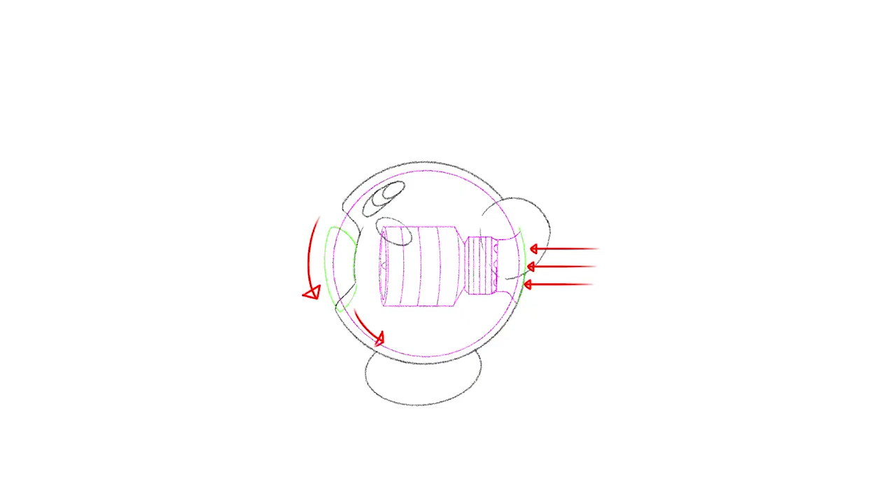The main feature I want for Kirby to have is to be able to blow air using a powerful fan and a motion sensor to activate it. So when someone walks in front of him, the fan will activate, producing a gust of air. I'm also planning a rear panel for air intake and access to all the mechanics inside him. I might add a moving mouth, but that's still undecided.

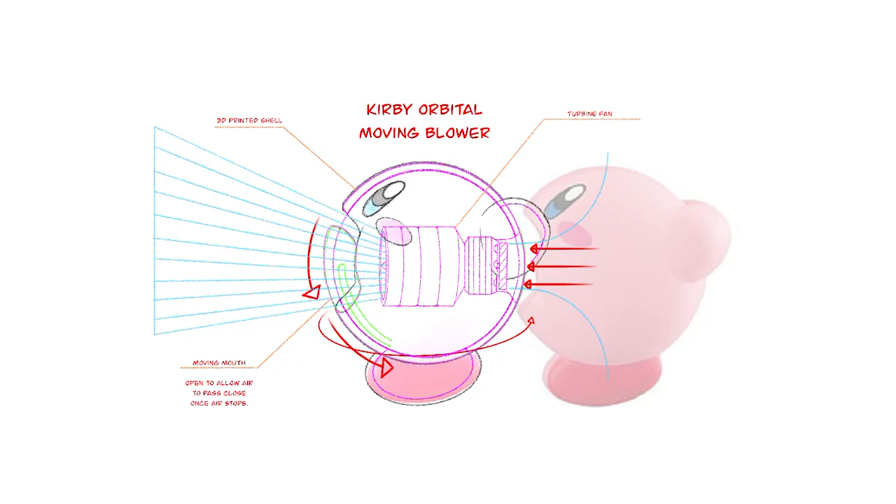His eyes, however, will definitely be able to move in all directions and light up. And finally, I want him to be able to tilt forward and back on his toes, enabling the fan to point up or down.

In Shapr3D, I based Kirby's body design on a simple sphere. He's one of the simpler models I've designed. There's not many fine details, so the design came together pretty quickly. The tricky part will be the eye mechanism, since Kirby's eyes aren't just simple circles.

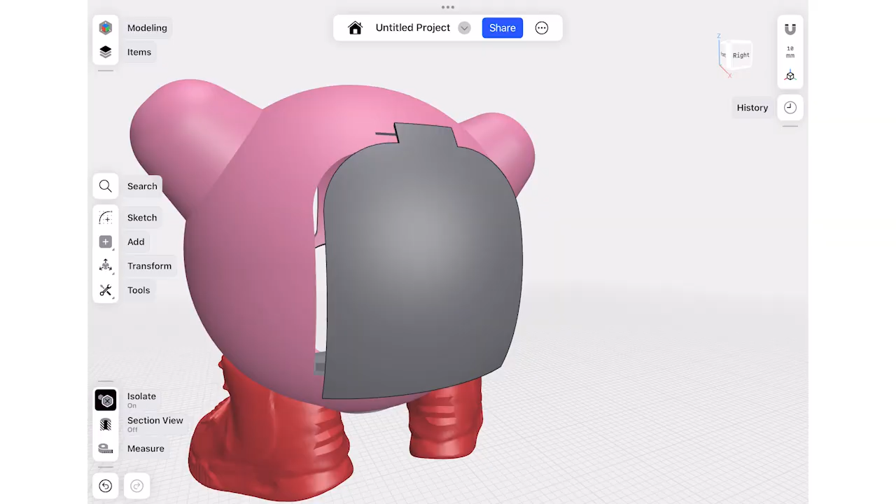You might notice that the shoes in my model don't match the ones in my thumbnail. I'll explain that in a future video. And the rear panel will be printed separately since it will need to be able to properly open and close. I think this is a good stopping point here though, and it looks just like Kirby to me.

Next, I moved into Meshmixer to cut the design into multiple pieces for 3D printing. I ended up slicing the model into 8 pieces. The way my cuts were made, I should be able to print each piece with less support in a shorter time period. The size I want Kirby to be reassembled is 18 inches arm to arm and around 24 inches from his feet to the tip of his arms.

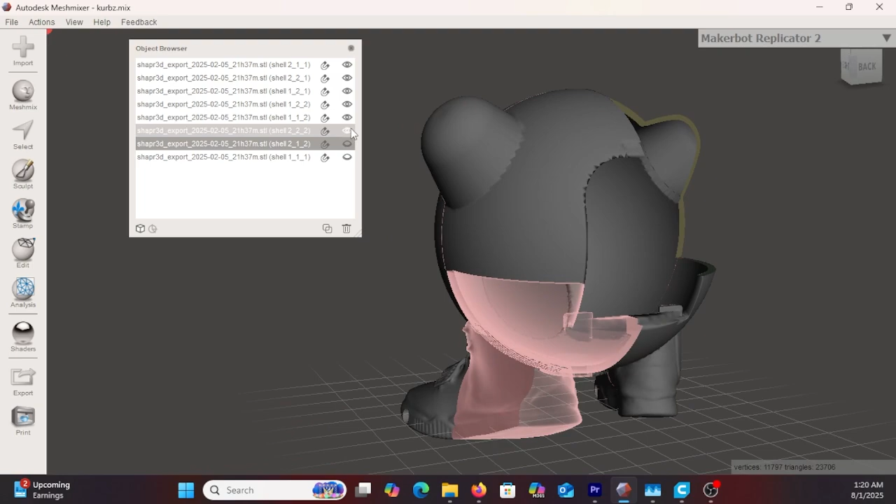I didn't add any male or female joints this time, but the seams will be glued later down the road. The bigger pieces will be printed on my Ender 3 V2 Neo, while any smaller ones will be printed later on my Ender 3 Pro. After all the parts were cut, it's time to send them to our slicer and prepare them for printing.

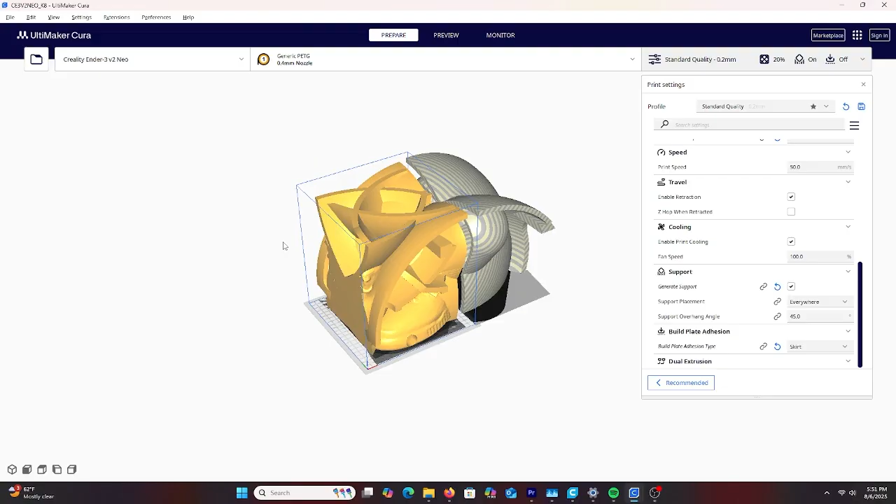Today I'll be using Cura to set up our print files. I imported and separated all the STL files, checking each piece's dimensions so nothing came out mismatched. This step is critical when printing large models on smaller printers because you want to maximize the print size without exceeding the print bed limits.

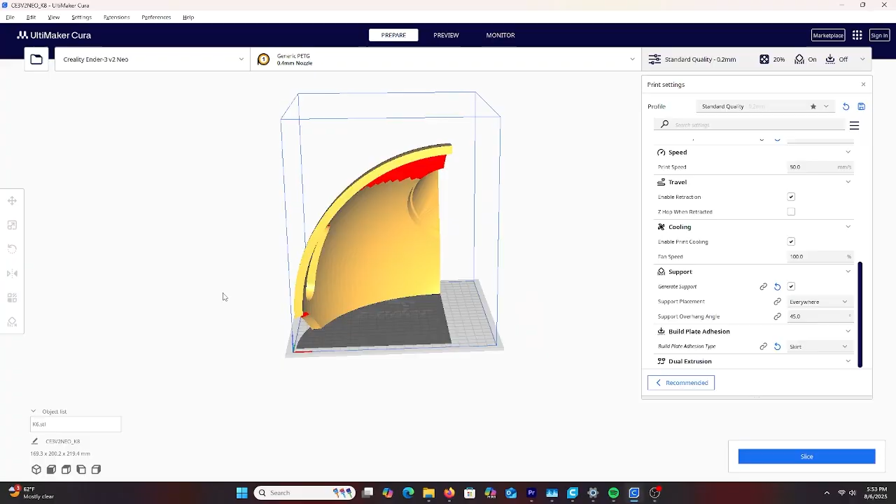That also means each piece's size is maintained relative to all the others so no part is the wrong size during assembly. Once all my files have been scaled up or down at once, and each piece fits on the bed, we're ready to print them all one by one.

After printing all 8 pieces, I gave each one a thorough sanding with 120 grit sandpaper on my orbital sander. I worked over the inside and outside surfaces evenly, but I also paid attention to the connection points. Those seams need to be a bit rough for the glue to bond effectively. Kirby's rounded design meant I could rely on my power sanders for the bulk of the work without worrying too much about damaging sharp details.

The sander made quick work of the rough edges, but I still checked each piece by hand to catch anything I may have missed with the sander. Once the major sanding is done, I'll switch to a finer grit before painting, ensuring the surface is perfectly smooth and free of even the smallest ridges. That extra prep will make the paint job pop and help the final piece look more professional.

One of the big advantages of printing in separate parts is how much easier it makes sanding and removing support material. You can hold each piece at the right angle and get spots you'd never reach on a fully assembled print. Of course, the trade-off is when it's time to put the whole thing back together, the seams have to line up with almost surgical precision, and there's no room for sloppy alignment if you want it to look like a single flawless piece.

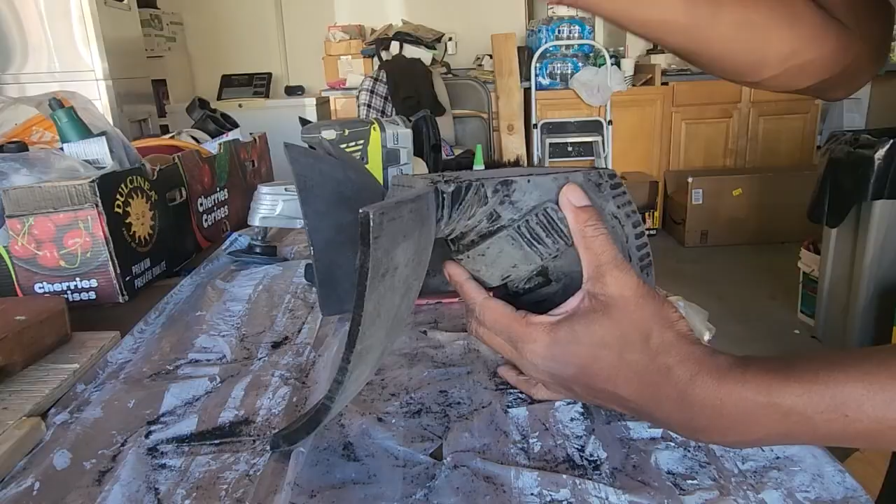To begin my gluing process, my go-to adhesive is Gorilla Glue Gel, specifically the one with the green cap, because it strikes the perfect balance between strength and precision. The gel consistency means it doesn't run or drip, which is a lifesaver when working with curved pieces like I am. Since I roughed up the edges earlier that needed to be glued, the extra texture gives the glue more surface to grip, helping create a bond that can stand up to handling over time.

Once everything was prepped, I moved fast. Gorilla Glue gel starts to set in as little as 10 seconds and can fully set in under a minute, so there's no luxury for slow adjustments. Each joint had to be aligned the first time or I'd risk trying to break the bond to fix it.

Some of the printed parts had a slight warp from the printing process, nothing too dramatic, but enough to leave a gap if ignored. To fix that, I used small clamps to draw the edges flush, holding them until the glue fully cured.

The final two back panels were glued together off camera, but the process was the same: prep, align, clamp, and let the adhesive work its magic. By the time everything was assembled, I had gone through almost 3 full bottles of glue, which is proof that even a simple design can be surprisingly hungry for materials when you're aiming for a seamless finish.